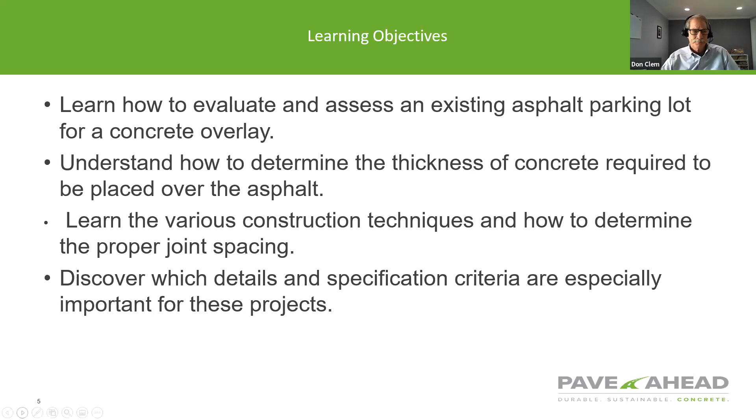Our resource primarily is this green guide, we fondly call the green guide, Guide to Concrete Overlays of Asphalt Parking Lots. This is published by the National Concrete Pavement Technology Center, out of Iowa State in Iowa. This is a very well-written guide.

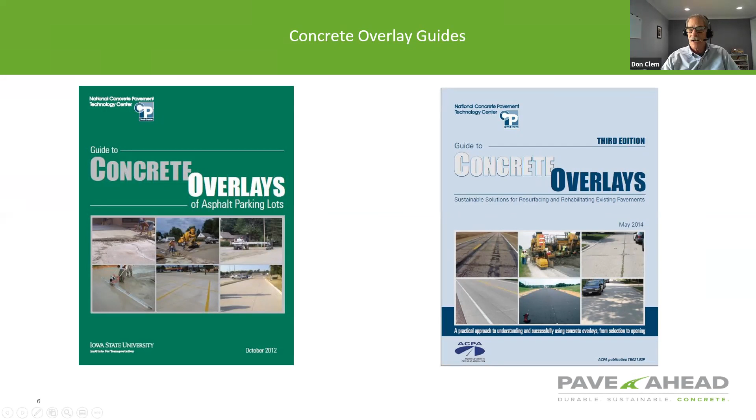So the green guide is for parking lots, and that's going to be the basis of our presentation today. Very easy to read. We also have, just as a reference, the blue guide, which is the Guide to Concrete Overlays, for roadways and streets, an excellent publication as well. The green guide was published in October of 2012, and we're in the process right now of rewriting that guide.

So just a little of my background. I've been in the industry since the early 80s, and actually my early career was a land development engineer for about 10 years, and then I moved into the concrete industry after that point. Most of my career has been in Colorado, working in the concrete industry, a lot of it designing pavements.

I'll give you just a brief history of pavements in Colorado, the overlays in Colorado. We really started those about the time I started in the industry, the late 80s. Illinois, I would note, has built a lot of concrete overlays. Colorado, just the DOT, has built over 1.5 million square yards of 6-inch overlay, and also 10 million square yards of concrete overlays of all thicknesses. They've done quite a bit more of the 8 and 9-inch overlays on state highways. They did a lot of that early on.

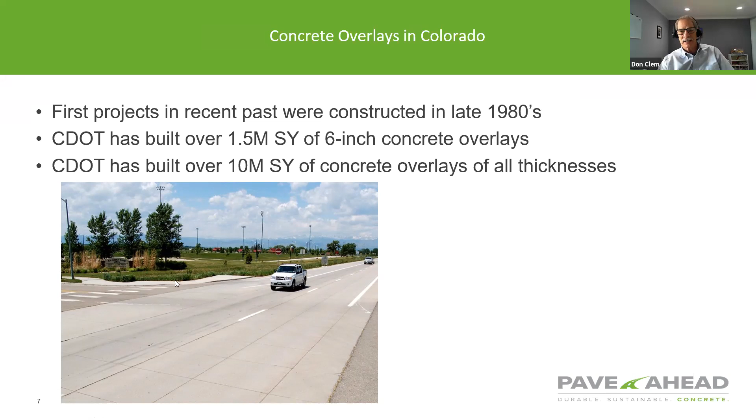Talking about parking lots, which is our focus today, the first one I was aware of in Colorado was a doctor's office in Monte Vista. This gentleman's Leonard Velasquez, contractor down in that San Luis Valley. This project that he built in '88, this is a photo 30 years later in 2018, was supposed to be a remove and replace of an asphalt parking lot with concrete, but the subgrade was so bad it wouldn't support the equipment as they were trying to tear out the asphalt. So they decided to do an overlay. They had read about it in a magazine and sort of just did it without a lot of knowledge. And as you can see, it's still holding up today. There's a few cracks, but 30 years is pretty good performance.

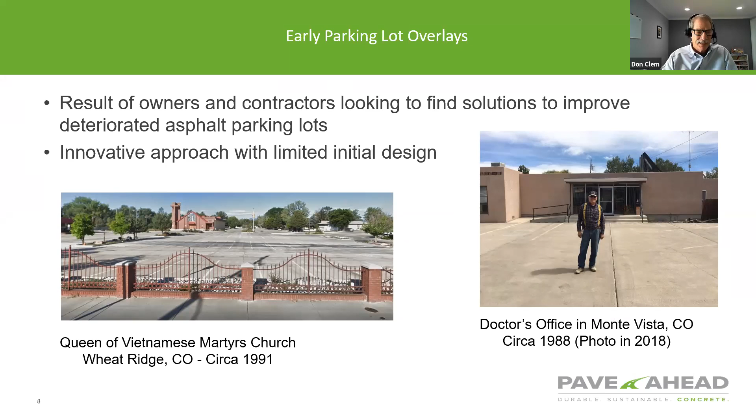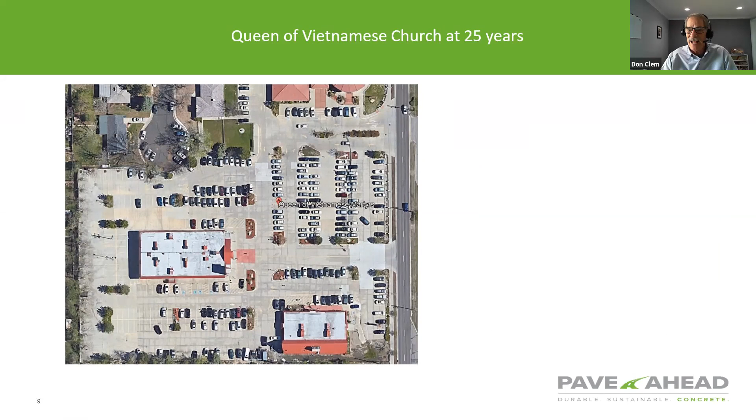Another old one, 1991, was the Queen of Vietnamese Martyrs Church. Interesting story here is this parking lot, which is pretty good size, was built by the parishioners. It was really an interesting project to watch. They used 2x4s as the forming material, 2x4 as the screed - very rough construction, as you can imagine. But after 30 years, you can see that this parking lot has really served them well. You can see how rough it is just by looking at the picture, but you can see an area here that they have replaced and an area here. Other than that, this is all the original overlay that those parishioners built. They were able to do that cheaper than an asphalt overlay since they did the labor themselves. That's a unique situation.

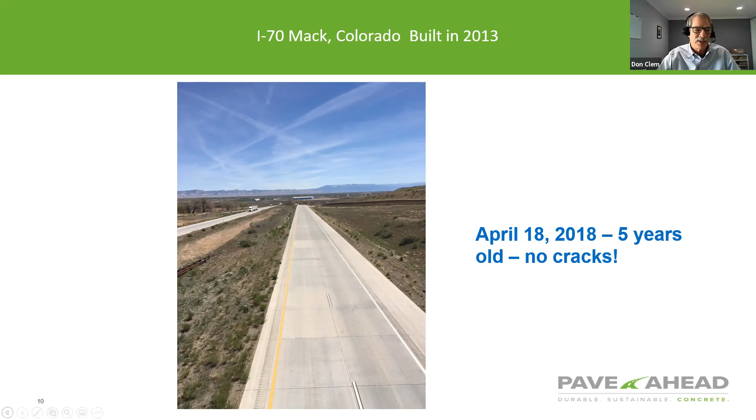The last project I'll show you as far as a roadway in Colorado is this - actually Interstate 70. This is a 6-inch overlay with 6 by 6 foot joint spacing. We call that our 6 by 6 by 6 Colorado overlay. The reason I put this in here is I just want to illustrate the top end of what these overlays can carry. So this is a 6-inch overlay on I-70, about 5 miles in from the western border of Colorado with Utah. It's a 5-mile project on both sides of the roadway. I took this picture when it was 5 years old, and I couldn't find a crack in it as I was driving down each of the sides of the interstate. For the pavement engineers on the call, the design traffic on this, if memory serves me right, was about 8 million ESALs. Pretty good traffic, and 6 inches is carrying that traffic. I think this was on about 8 inches of asphalt. So that's just to illustrate kind of the top end of what these bonded concrete overlays can do.

So you're probably asking, why specify a concrete overlay? Well, there's quite a few reasons, but probably the biggest reason is economics. We find that many times it's cheaper to go with a concrete overlay over an asphalt parking lot compared to remove and replace. So if we're looking at remove and replace, basically at the end of the life of the asphalt parking lot, keep in mind that these overlays can actually be less expensive, on the order of about 30% has been my experience. It's a better use of materials because the owner has already paid for the asphalt and the base, so why not reuse it as opposed to tearing it out and paying somebody to haul it off? It just doesn't make a lot of sense. This is a much more sustainable type of an approach.

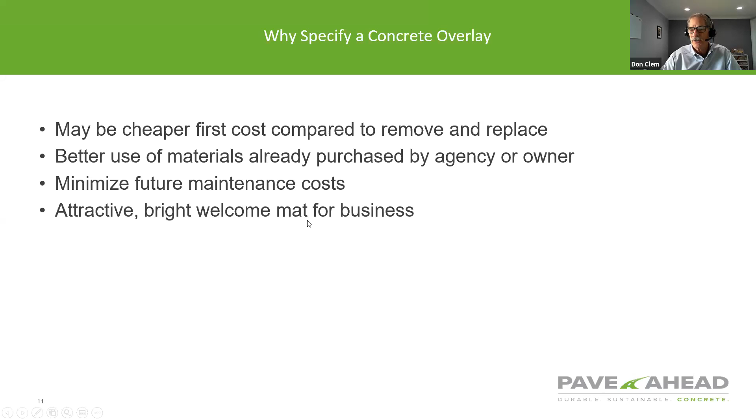Once you create the concrete overlay, you're going to minimize your future costs because basically you have a concrete parking lot from that point on, sitting on a very good base. And then finally, you're going to have a bright welcome mat for your business. It really transforms the parking lot from a problem into something that attracts businesses.

So let's talk about parking lot selection, because that's really important. That's the key to a successful project, is to determine if a project is a good candidate. An asphalt parking lot is a good candidate for a bonded concrete overlay, or perhaps it may not be. And it's real critical to be able to discern the difference between the two.

I'll mention here that the two types of overlays for an asphalt parking lot are bonded or non-bonded. We would always rather prepare a bonded or design a bonded overlay if we have everything else equal, because a bonded overlay, which is going to behave as a composite pavement with the asphalt, is going to be less thickness. Generally an unbonded overlay is going to be about 1 inch to 1.5 inches thicker than a bonded overlay. So a bonded overlay is going to be more economical where we can do that.

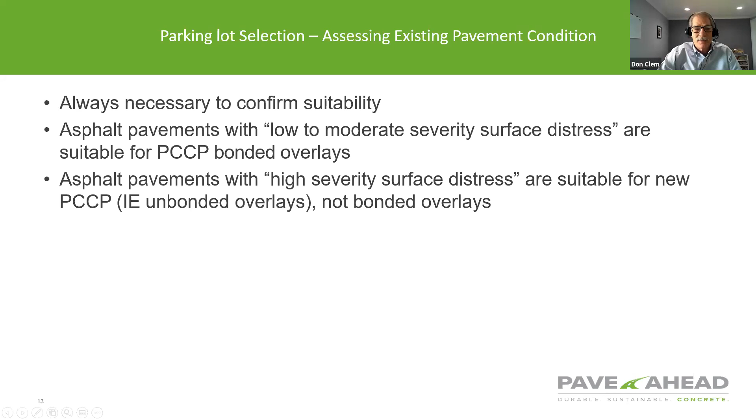And what we're going to look at, right out of the green guide, is different types of distresses that we typically run into with asphalt parking lots. We're going to put them into categories of low to moderate severity or high severity surface distress. If we're in the low to moderate, that's going to be a good candidate for a bonded concrete overlay, as long as the thickness is there. If not, then we may have to look at something like an unbonded overlay, or perhaps a remove and replace at that point.

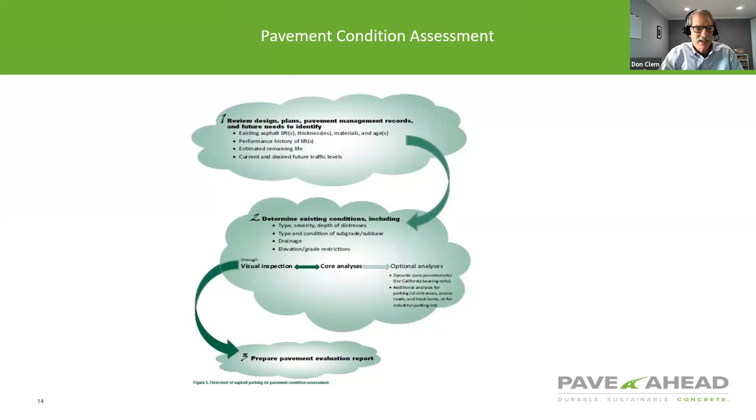So there's 3 steps that the guide puts out as far as determining the suitability. One is to review the existing information, plans, maintenance records, history, things like that are there. Second, determine the existing conditions. And then third, you want to compile that information.

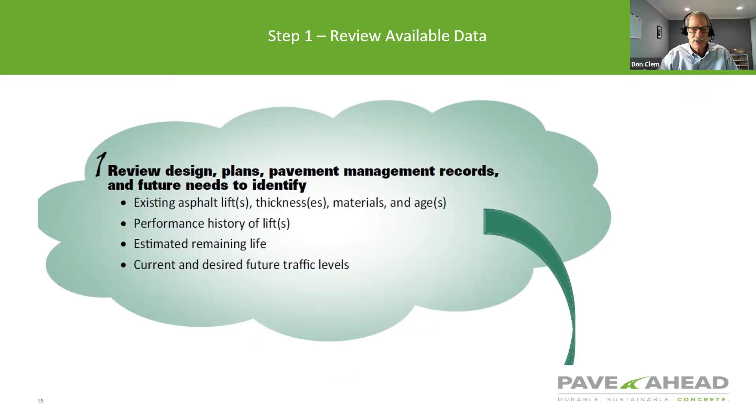So we start with a review of information that is on hand, any kind of written information, performance history, estimated remaining life, current and desired future traffic. So we're really trying to find out everything we can about the parking lot. We're looking for any problems associated with the parking lot, such as drainage. We really want to uncover everything we can about that history of that parking lot.

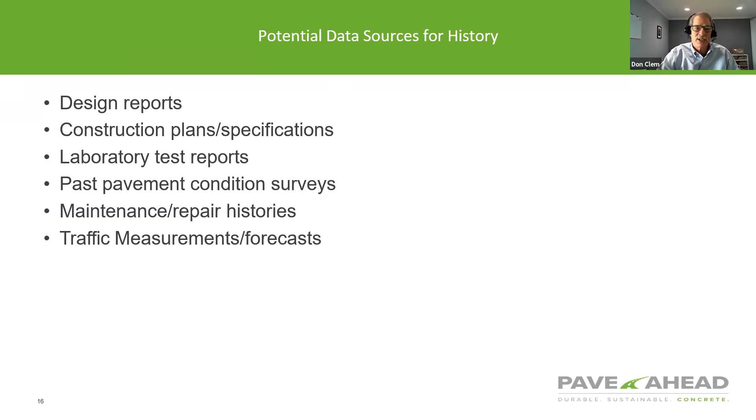Some of the items that we might turn to or look for: design reports, geotechnical reports are good to determine, give us an idea of the properties of the soils below the pavement. Construction plans are great, past condition surveys if they exist, maintenance and repair histories, particularly history of overlays that might have occurred. And if any kind of traffic measurements are forecast, particularly if the traffic is going to change with this new parking lot, you certainly need to know that.

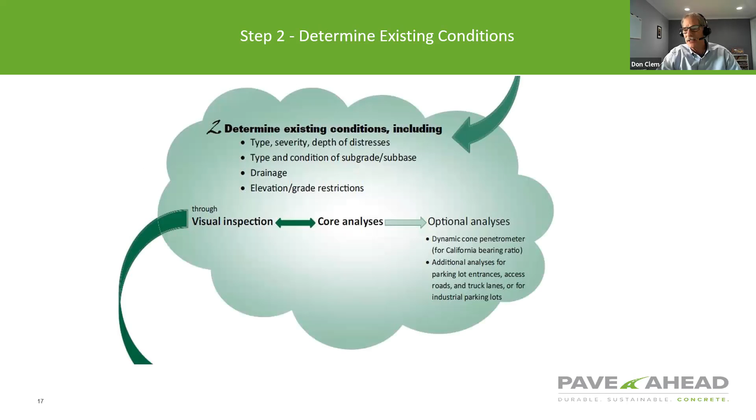The next step, which is probably the most important, is to actually go out to the parking lot and review what you have out there. Do an assessment on site. We want to determine the type and severity of any pavement distress and condition of the subgrade. So we're looking to do some cores, or at least drill some holes, so we can see how thick the layers are and see what kind of shape the materials are in.

We also want to look, if there are distresses, we want to determine the cause of those distresses. Is it a drainage issue? Because if it is, when we design an overlay, we want to make sure we address any drainage or other potential problems. And then finally, we want to look to see what kind of elevation constraints we might have. Are we surrounded by garages where we have to tie in to an elevation? Or do we have a situation where we have a curb and there's really just landscaping behind it where we can overlay the curb? Those are the types of things we're looking for.

So I mentioned we definitely want to take cores. It's very critical that we know how thick each of the layers are, and we have to take enough cores to have some confidence of what the minimum thickness is, because we always design based on the minimum thickness that we find in a given area.

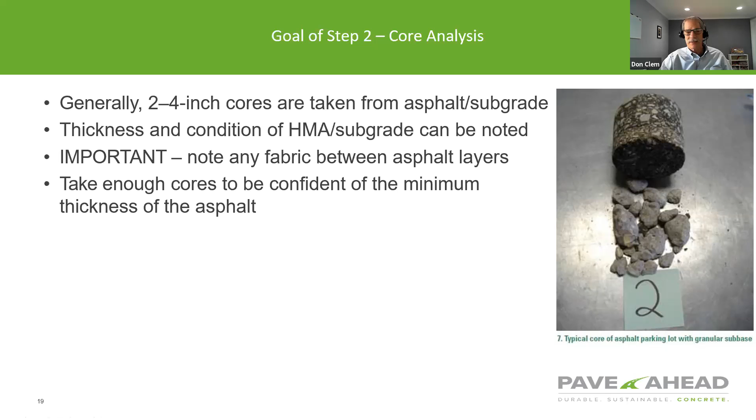So always look for this fabric. If you find it in there and it's acting as a bond breaker, which it typically will, then you probably don't want to design a bonded overlay. You might want to look at an unbonded overlay in that situation, or maybe even a removal and replace. And then finally, you want to take enough cores to make sure you're confident of the thickness of the asphalt out there. It really is a critical element.

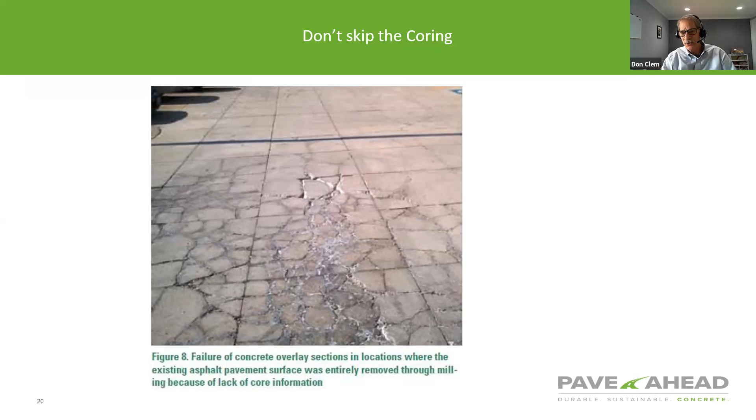And I have experienced this myself. We did an experimental project in about '91 or '92 with the Department of Transportation out here. We had the same thing happen - we punched right through the asphalt to the subgrade. And what we did is we wanted to test a bonded concrete overlay. So what we did is we put a new layer of asphalt back in there, thinking we were trying to test that as a bonded overlay for the concrete.

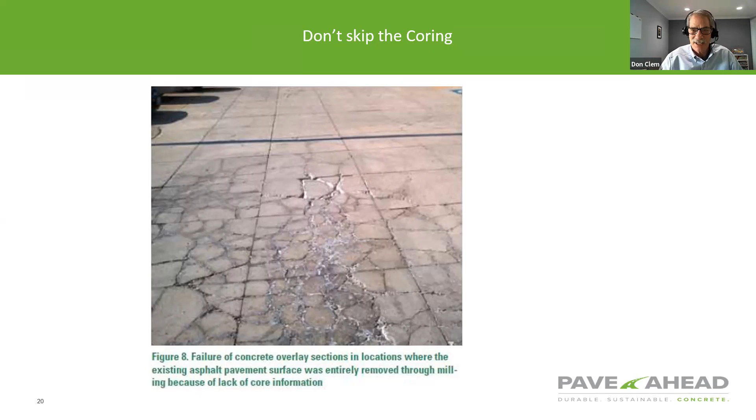What happened was that didn't work with the new asphalt because we didn't get bond. As many of you know, new asphalt acts as a bond breaker. So we learned that lesson pretty quick. It didn't look as bad as this, but it was pretty bad. And actually, after almost 30 years, I go by this project about once a month, and it's still in place - the fibers are holding it together, but it really looks bad.

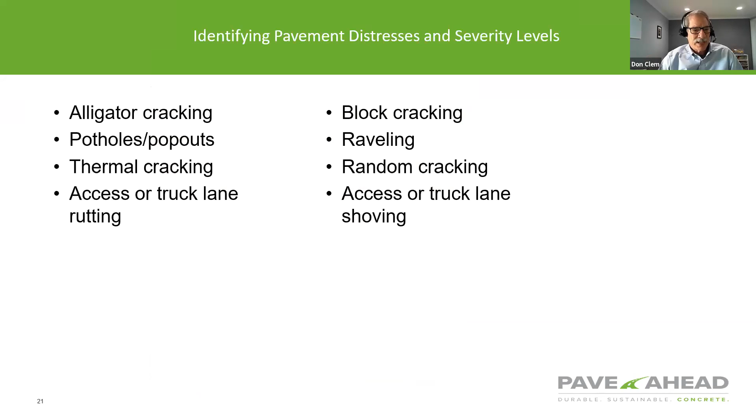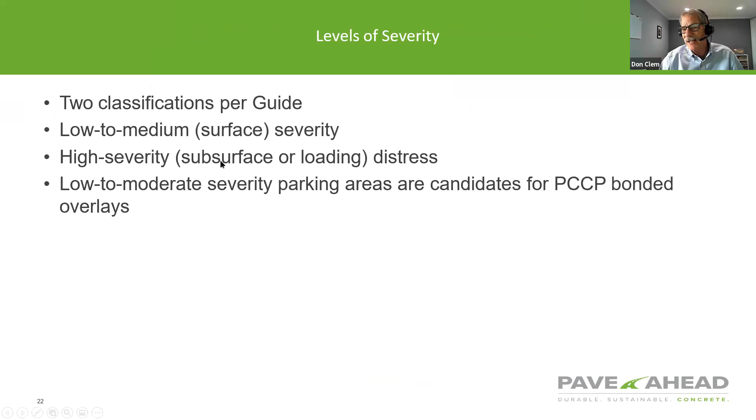So these are the types of distresses identified in the guide, and I'm going to go through these quickly, but the guide will identify and have pictures of low to medium severity and then high severity. Generally speaking, what you're going to observe - this is alligator cracking - in the high severity is some vertical separation. There's a vertical component to high severity areas of distress, and that's going to be consistent through all of these pictures and types of distresses we examine.

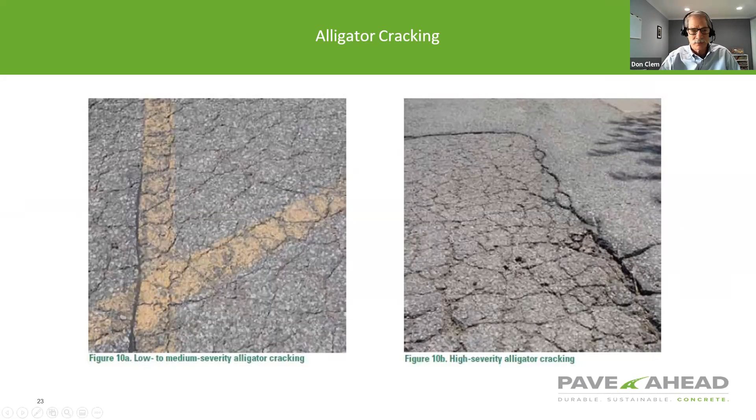So this area, low to medium severity, is fine for a bonded overlay. The high severity is not. In this situation, if we have a lot of areas like this, we're going to look at an unbonded concrete overlay or perhaps a remove and replace.

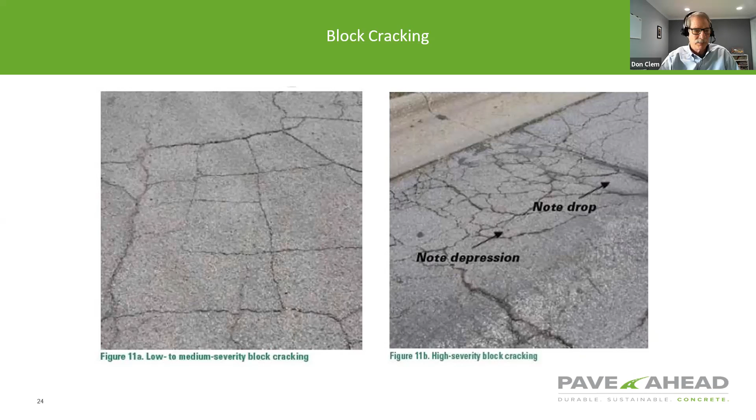Block cracking, you see here - another type of asphalt distress. Again, low to medium on the left, high severity on the right. Potholes, raveling - you can see kind of a vertical component here.

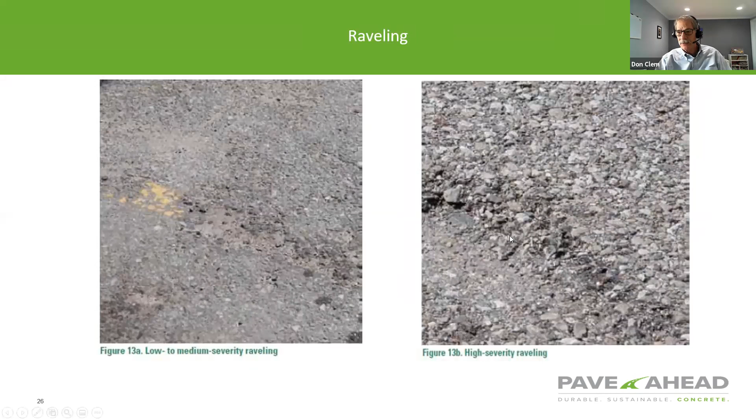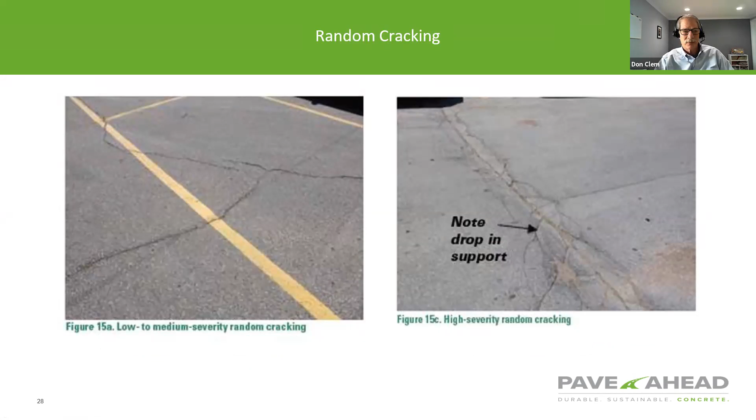Thermal cracking, random cracking - the guide does a really good job, particularly for someone with a concrete background, of outlining what you look for as far as distress with an asphalt pavement.

After we do this field examination of the project, and we've done the research for the design reports, and you speak to managers about what problems they have on the facilities, then you prepare this evaluation report. You pull all this information together, and at that point you're determining whether you can go forward with a bonded concrete overlay, unbonded, or what the best approach will be. We say prepare a pavement report, but it may just be a one-page document, not necessarily multi-page. Depends on the size of the project and complexity.

Just to recap, when we're looking at an existing parking lot, we want pavements that exhibit low to medium surface severity. We want at least 2 inches of asphalt - I prefer 3 myself, but the guide does go down to 2 inches. So we do offer design for 2 inches.

And then we want minimal vertical constraints along the edges of the project relative to the area of the overlay. This is sort of a judgment call - I'll give you an example. If you had a fairly small parking lot, let's say a townhouse project, maybe 70 by 70 or 100 by 100, surrounded by garages and townhouses. All the way around this project, you've got to match to those garages, so around the perimeter you're going to have a transition where you go from matching that garage up to the overlay, plus drainage considerations. You've got probably anywhere from 5 to 10 feet of transition going from full depth up to the overlay, all the way around that area.

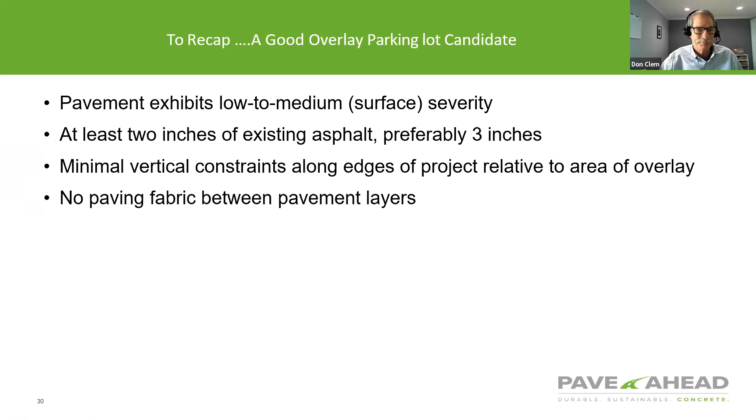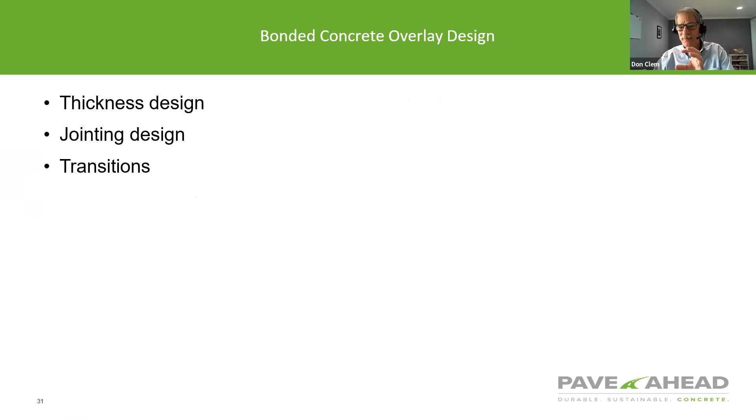So let's talk a little bit about thickness design and jointing design. They really go hand in hand, as you'll see - you're really designing a system where the thickness design and the jointing design are intertwined.

Now we're going to focus a little bit more on the guide. The tables in the guide are really meant for light duty parking lots - we're not necessarily looking at industrial facilities. We're looking at shopping centers, golf courses, churches, typical municipal buildings. That's the type of parking lot envisioned when this guide was put together.

The design is based on full or partial bond, as I mentioned before, which forms a composite pavement. The key to this working is really the close joint spacing. If you can imagine, that close joint spacing really reduces the stresses in the concrete pavement - think of the moment arm as you look at a 4 or 5 foot joint. That's really a small concrete panel, and the stresses are greatly reduced by that small moment arm.

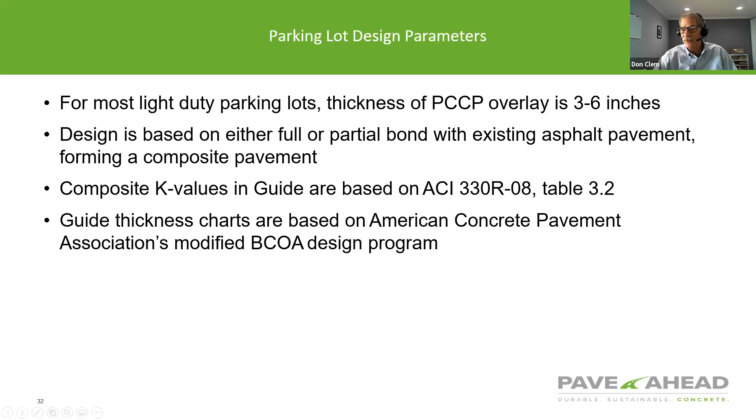The K values are out of ACI 330, which is the design guide for concrete parking lots, table 3.2. And the basis of the design is the American Concrete Pavement Association's modified bonded concrete on asphalt design program.

The guide operates on a zone concept - a little bit different concept. Each area, there's 3 areas in the design, we'll go over those in a minute, but we use the zone concept.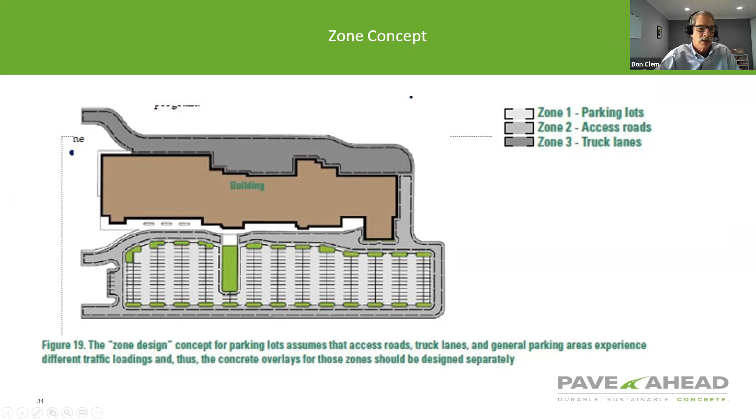So 3 different thicknesses, if you will, on a given project. Each table includes those 3 thicknesses, and we have 3 tables here: one for Des Moines area, which is probably what you would use being in Illinois, one for Sacramento, and one for Gainesville.

So you can see that this is a mechanistic design. It takes into account the elevation, the weather patterns, and moisture patterns for a given location. Existing asphalt thickness is 2 to 6 inches, joint spacing 4 to 6, fiber or no fiber condition, and finally compressive strength of 4,000 or 4,500.

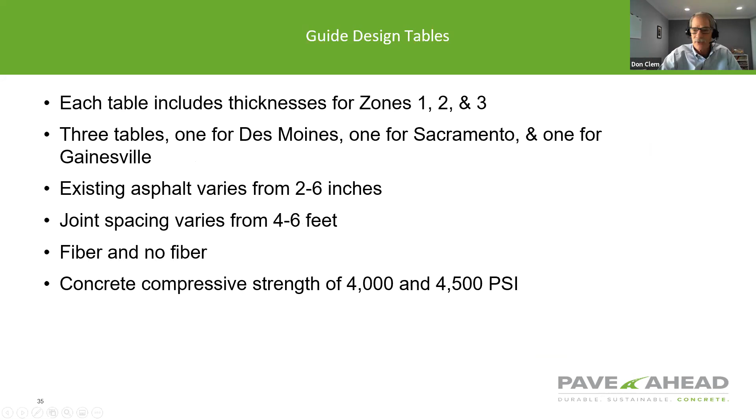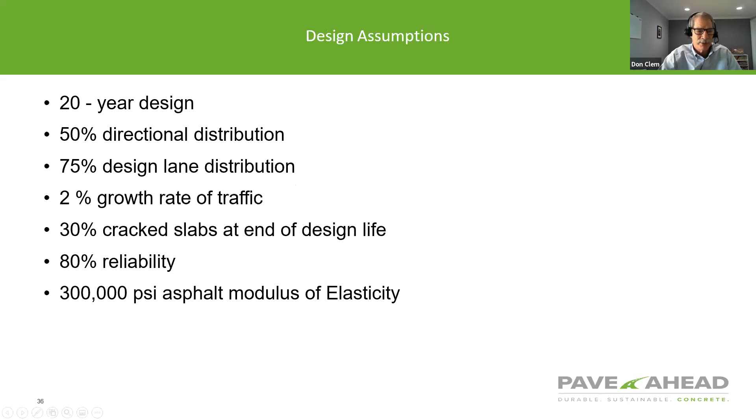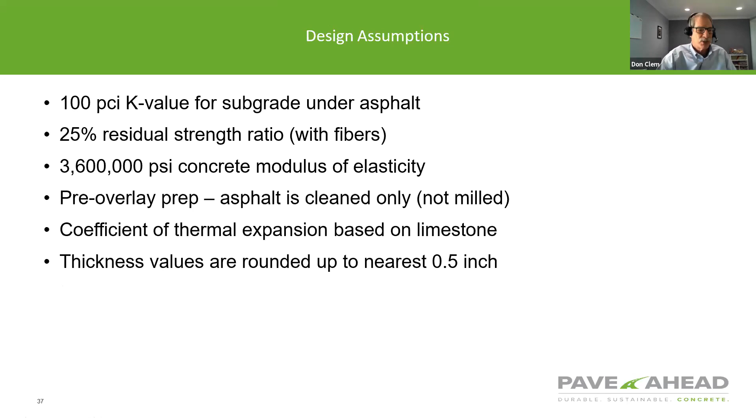Design assumptions, probably the critical ones, are the 20-year design, 30% slab cracks at the end of design, 80% reliability, and an asphalt modulus of 300,000. The other critical one would be this K value of 100, as I mentioned earlier, which is a fairly poor clay soil, typical in a lot of areas of the US.

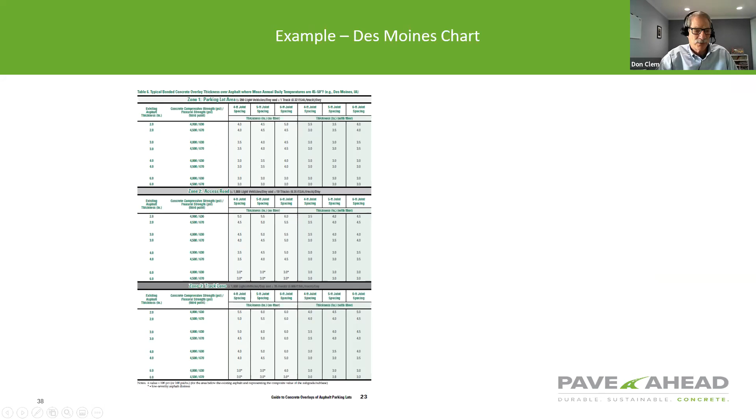So here's what a chart looks like. This is the chart for Des Moines, and you can see we've got zone 1, zone 2, zone 3. Let's assume we're going to design an access road for a project. Let's take a look at Des Moines, perhaps we're in Illinois, so we're going to use the Des Moines chart. The way we use this chart is very simple.

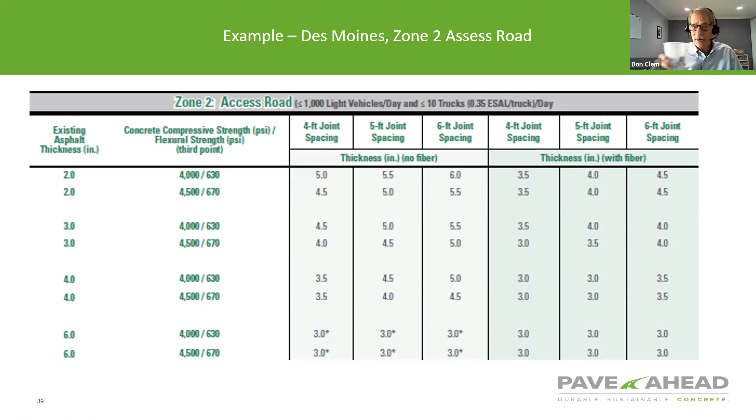We start over here with the existing asphalt thickness, and let's say we've determined that the minimum asphalt thickness is 3 inches. So we know we're going to be in one of these 2 rows, and the next decision we make is, do I want 4,000 psi or 4,500? If I'm in Illinois, I'm probably going to spec 4,500, and that's probably what I would spec here in Colorado.

Due to the heavy use of de-icing salts and a lot of freeze-thaw cycles, let's just assume 4,500. So that locks us into this row. Next decision is, do we want a no-fiber condition or a fiber condition?

I generally, for most parking lots, will go with this fiber condition. I like the extra protection of the macro fibers in there, and we are referring to macro fibers, not microfibers. So let's go with fibers. Now we are down to these 3 columns within this row.

So you can see that we have 3 different solutions that would work for this theoretical situation. We can go with a 3-inch thick concrete with 4-foot spacing, 3.5 inch with 5-foot spacing, or 4-inch thick concrete with 6-foot joint spacing. Perhaps an engineer could price out each one of these to see which is the most economical.

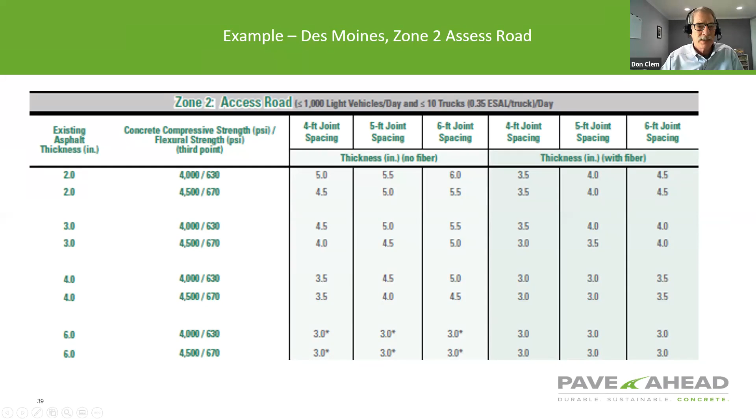When I do designs, I would generally fall to this one, the 3.5 inch with the 5-foot joint spacing, trying to balance the number of joints versus the thickness of the concrete. I'd probably prefer this 3.5 with 5-foot joint spacing, though other engineers might have a different preference, but you can see your options there. So that's how you would design the thickness and joint spacing of a parking lot.

I want to mention what you might do if you have a parking lot that doesn't fall into those parameters I've outlined. Perhaps the soil is a very strong sandy-based soil, with a K value of 200. You may want to go to this other model, bonded concrete on asphalt ME, which was developed by Julie Vandenbossche out of the University of Pittsburgh.

And it's really a nice program, it's free to use. You can hit the geographical information button, that's the first input, and then select Illinois. There's probably going to be about 6 or 7 cities that are going to pop up.

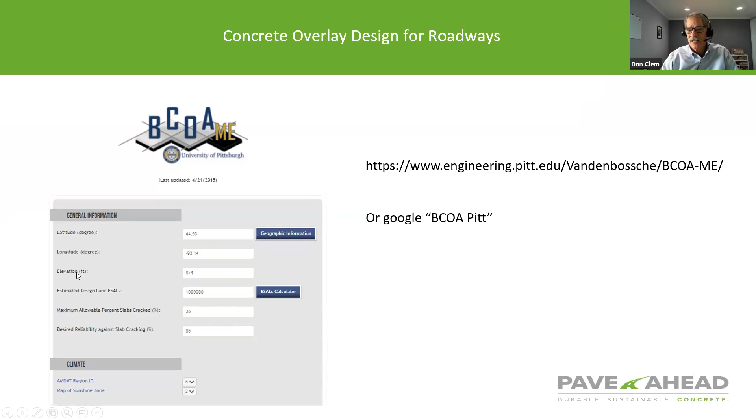Certainly Chicago, Springfield, and some other cities would pop up. You just select that city and it will populate latitude, longitude, elevation, and then you continue on with your inputs. So that's what you might do for a street.

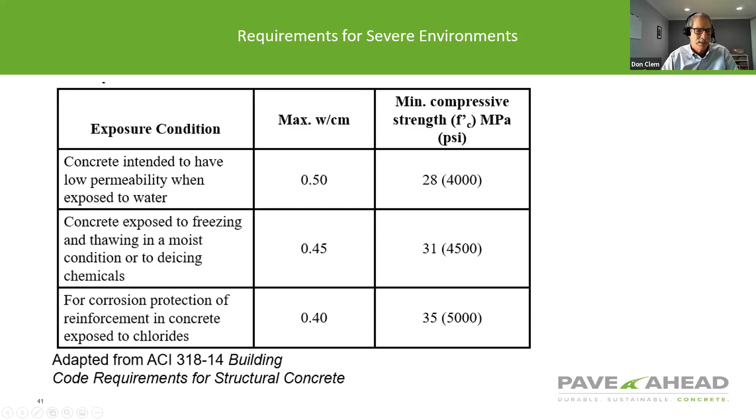I'm not going to talk a lot on mix design because there's really not a whole lot of difference between a concrete overlay and just an ordinary concrete pavement. But I mentioned you want to be at a 0.45 water cement ratio and 4,500 psi if you're in a freezing and thawing situation with exposure to de-icing chemicals. I think that's pretty common, at least for the Chicago area.

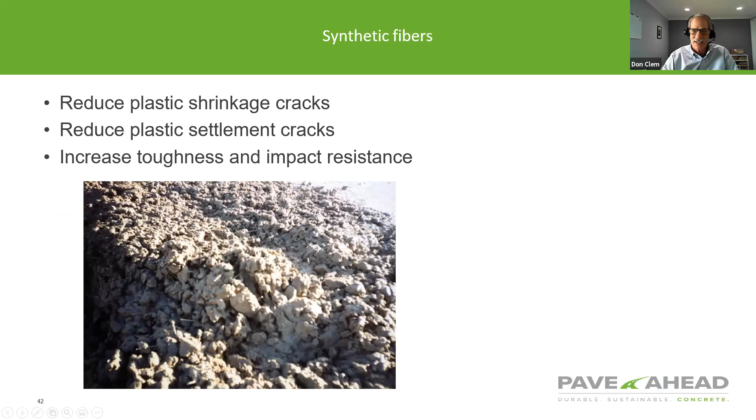A little bit on fibers. They are very important in these overlays, and they reduce plastic shrinkage cracking and plastic settlement, and they also increase the toughness and impact resistance. So there's a lot of benefits to fibers, but I do want to illustrate the difference between micro fibers and macro fibers. There's quite a few differences — it's really an apple and an orange. When we're talking about specifying fibers for overlays, sometimes called structural fibers, we're talking about macro fibers.

So we'll start with micro fibers. They're fairly small fibers. They do help prevent plastic shrinkage cracking. The dosage is normally fairly small, typically about 1.5 pounds of fibers per cubic yard, and they provide surface toughness. You see that these fibers are specified a lot of times — microfibers are specified for concrete sidewalks by cities. You'll see them in a city spec quite a bit.

Macrofibers, on the other hand, are larger and longer. They will actually reduce shrinkage cracking, and you can replace temperature steel reinforcement with these macrofibers, but the dosage is quite a bit heavier — it's 3 to 5 pounds per cubic yard typically.

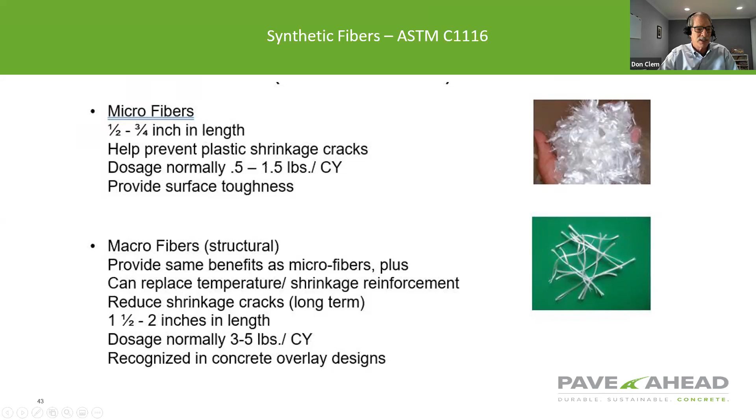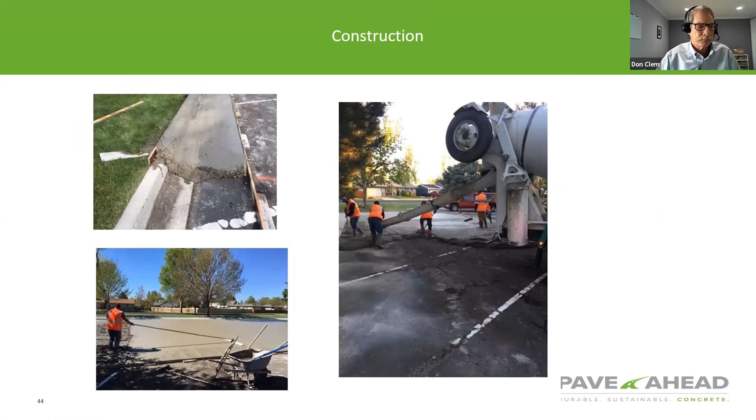With that, let's move into construction. Theron has been kind enough to provide more or less a case study which walks us through construction. We're going to use that to illustrate a typical overlay, and it really has all the elements, so it makes a great case study in construction of an overlay.

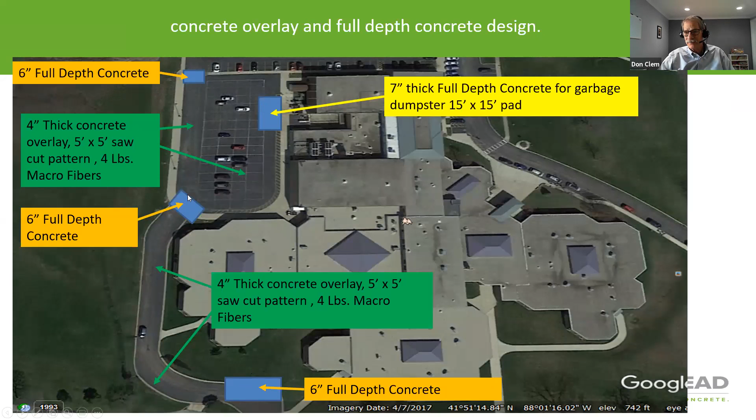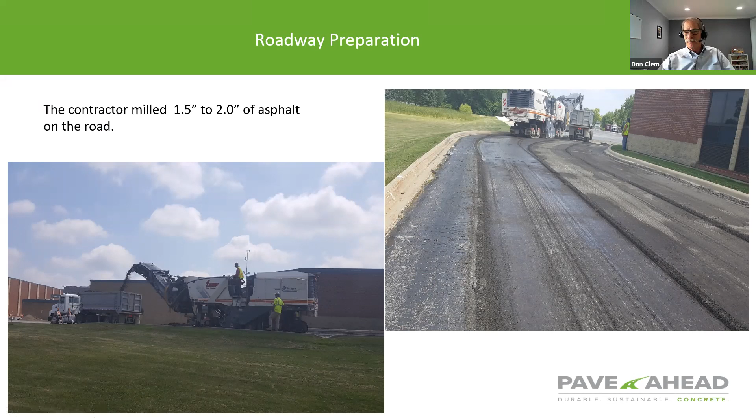For the roadway, the contractor actually milled the surface to get a nice level surface that you can see here, and that's fairly typical of roadways. When we build concrete overlays for roadways in Colorado, we typically will mill about 1 inch of asphalt off, as long as we have enough asphalt that we can sacrifice that inch. That is critical. For most parking lots, we do not mill, because generally there's not enough asphalt in these parking lots that you could afford to mill — you would be punching right through the asphalt with the milling operation.

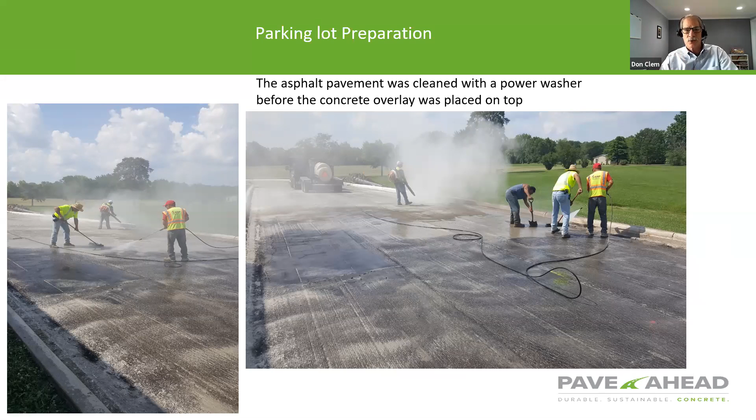So here you can see the surface prep. It consists primarily of a power wash, and then you follow that with placement of the concrete right on top of that. The other nice thing about this process of washing the asphalt down — you want to do that right in front of the paving operation as well, because it will cool the temperature of that asphalt surface off. You don't want to be placing concrete on a surface that's higher than 120 degrees. So if you wet that surface down, the evaporation process is going to cool that existing surface.

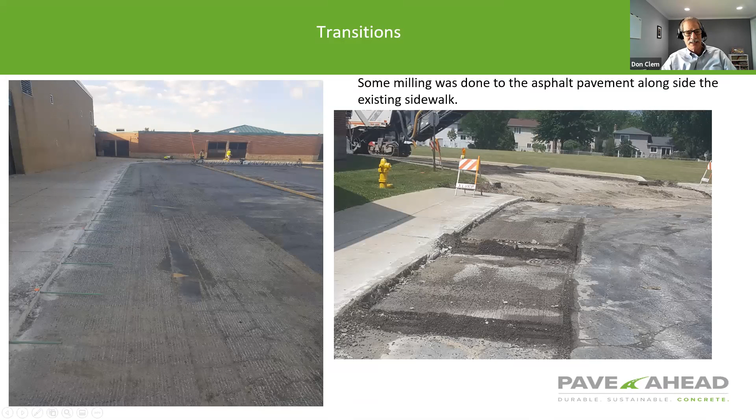Here you can see some transition areas that we saw in that sketch earlier — transition area here, transition area here. You've also got some tie bars tying into that existing concrete section there. Since this was a school, my assumption on the tie bars is they wanted to make really sure they did not have any kind of tripping hazard there, so they put the tie bars in to lock that in.

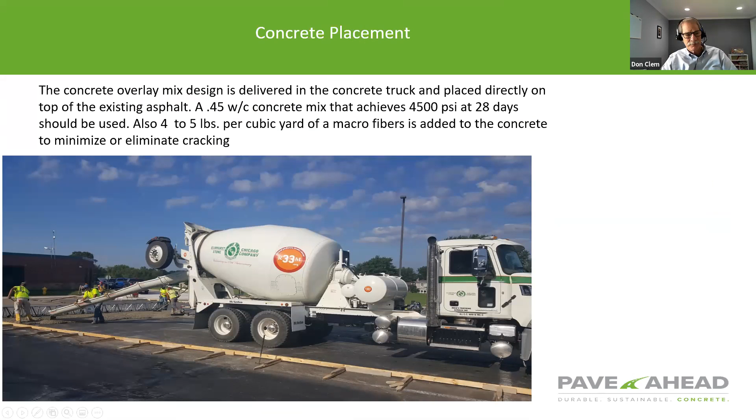I mentioned that the mix design was 4,500 psi, with 4 to 5 pounds of macrofibers. You can see they're forming right on top of the asphalt and placing right on top of that cleaned, and it looks like it's moist asphalt. Just another shot.

Then the concrete's leveled in the opposite direction to the paving train, and here you can see a razorback screed with a vibratory motor on it. This is a really nice way to build a project. You really get a good result, this is probably the way we see most projects get built. I'll show you a couple other methods as well, but this screed operation is probably most typical.

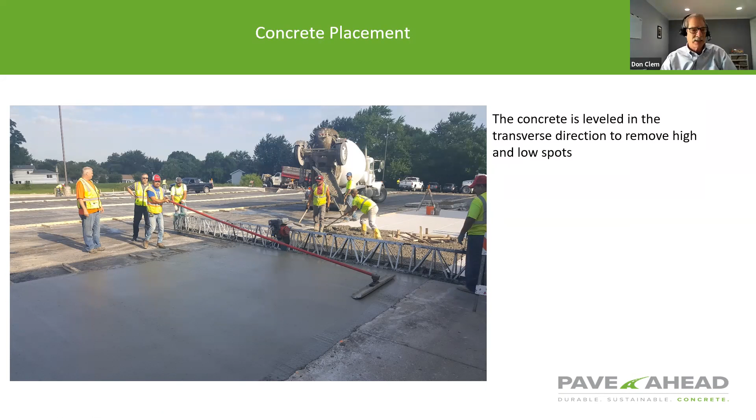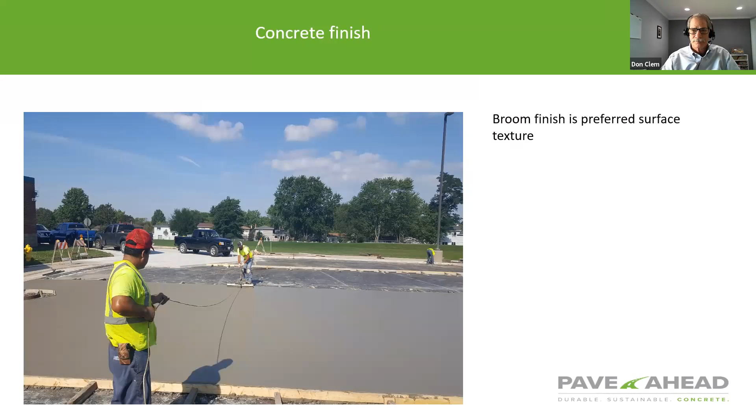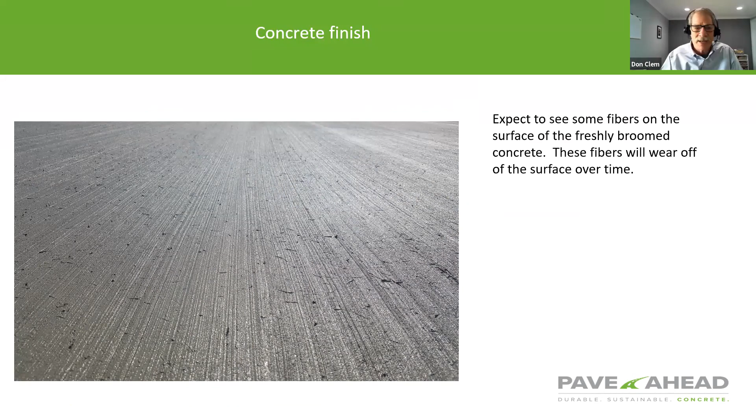And then finally, a broom texture is the preferred surface. Now with the fibers, these macrofibers, you can expect to see some of the fibers popping up through the surface, as you see here. Those will wear off over time, and you won't notice them after the pavement's been in service for a period of time.

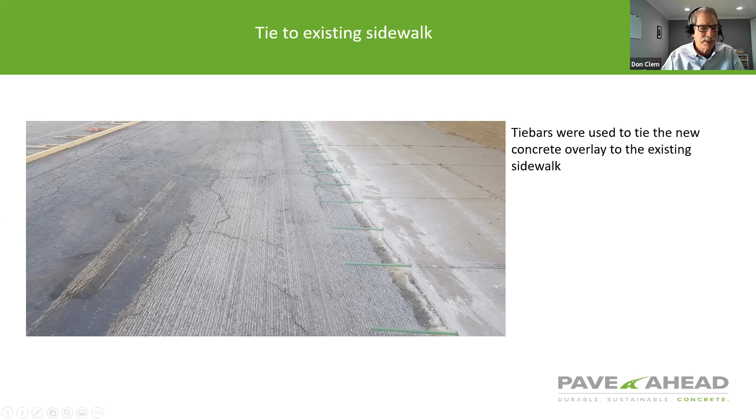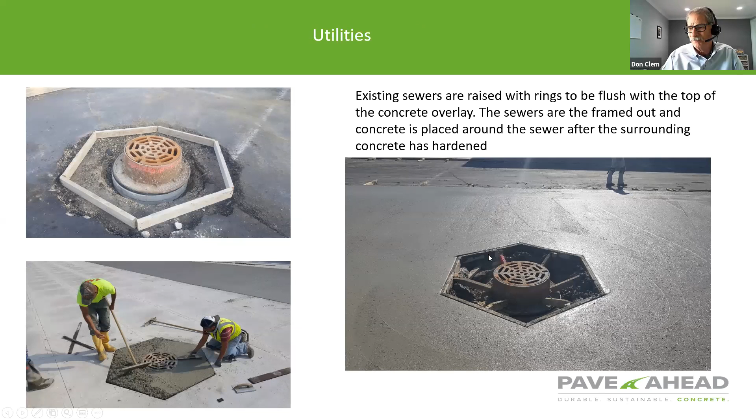And there's the tie bars put in to make sure that there's no tripping hazard here, because I imagine you get a lot of pedestrian travel on that pavement. Existing sewers were raised and boxed out, as you can see here. That's pretty typical of any concrete construction, any parking lot construction.

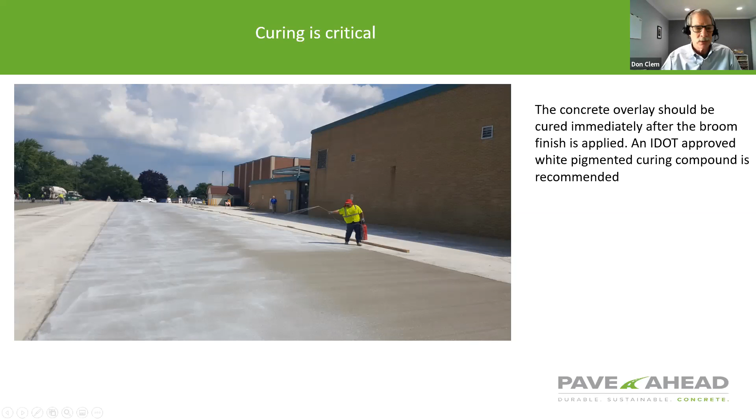And then finally, the curing compound was put on. You really want to put a heavy coat of curing compound on these concrete overlays, particularly these 3 and 4 inch sections, because imagine what you've got is a thin section of concrete, relatively speaking, to what we normally have. So there's not a lot of moisture in that thin section, but you have a lot of surface area. So if you're operating in, for perhaps Colorado, where we have very low humidity, we might have wind, it might be hot, we lose a lot of water out of that pavement if we don't get that curing compound on quickly and get it on very, very thick. So that's one of the considerations that's a little bit more important with a concrete overlay than it otherwise might be for just a regular concrete paving project. You really want it to look like a white piece of paper.

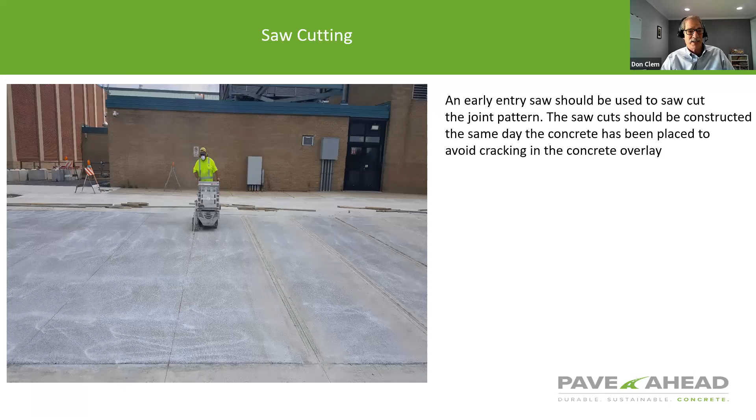And then here you see the saw cutting operation. This is an early entry saw, which is typically what we see for these projects. You can make the cuts the same day. You always want to have a backup saw on a project, of course, just like you would for any concrete pavement project, but it's a little bit more important because of the number of saw cuts you have to make on these projects. You've got a lot of joints.

And then an independent lab of record should be hired by the owner. And of course, all the testing should be done by ASTM standards, and the cylinders should be cured by ASTM standards, of course.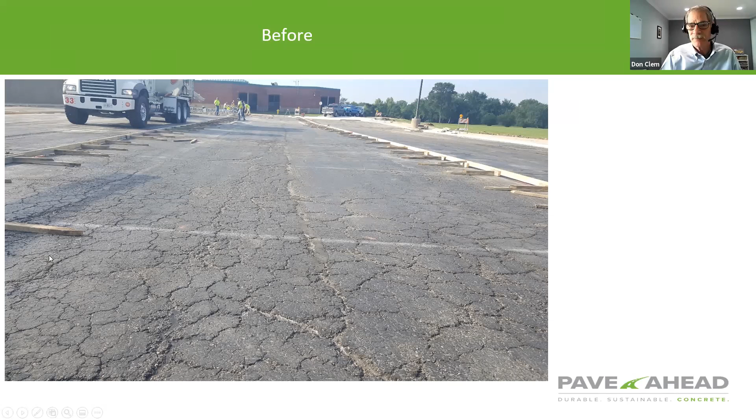Let's talk a little bit about details. I'm kind of watching my time. I want to make sure I don't run out of time.

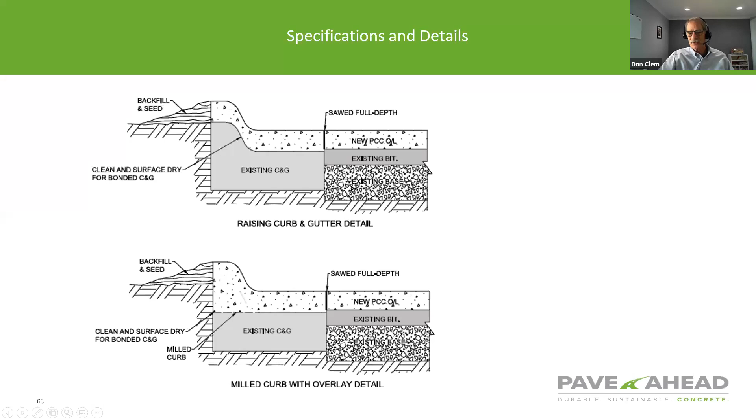So this project, this picture was taken in '97, and this is Parker Road, and it runs between Aurora, Colorado, which is where I live, and the town of Parker. It's a very, very busy road, as you can see here.

Here we just overlaid the curb using a shoe on this paving machine. This was a Gomaco paving machine, and we just overlaid that old curb, as you can see here. It was interesting. I was working on this particular project, and as an industry, we did not in '97 think this would work. And there was an engineer with the Colorado Department of Transportation that said this will work, and he put it into plans.

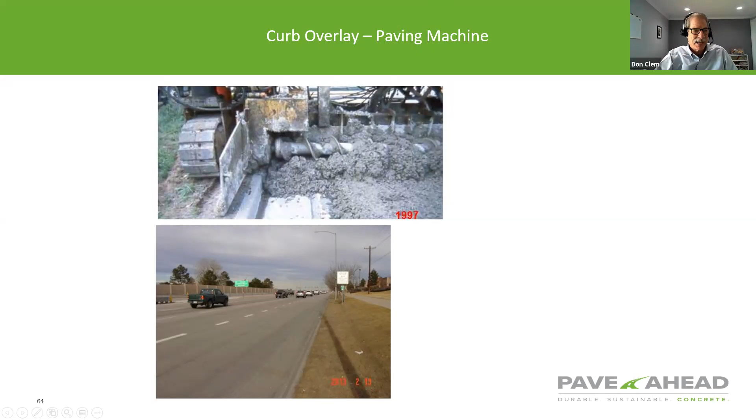Here's a shot in 2013. I drive this road all the time, and this curb has held up with no cracking whatsoever. So he was right back in '97, and we were kind of cautious as an industry, but that engineer, his name's Al Eastwood, he was correct.

Here you can see overlay of an existing curb, and they're just doing it by hand, and these guys do a wonderful job. This is on that Thorncreek project where I showed you the night shot earlier. The first step of the project was to overlay that existing curb, and that's what it looked like after they stripped the form there.

You can see here's basically an island within the middle of that parking lot. You can see other islands there. So the first step on this project is the contractor goes out and overlays all of these curbs.

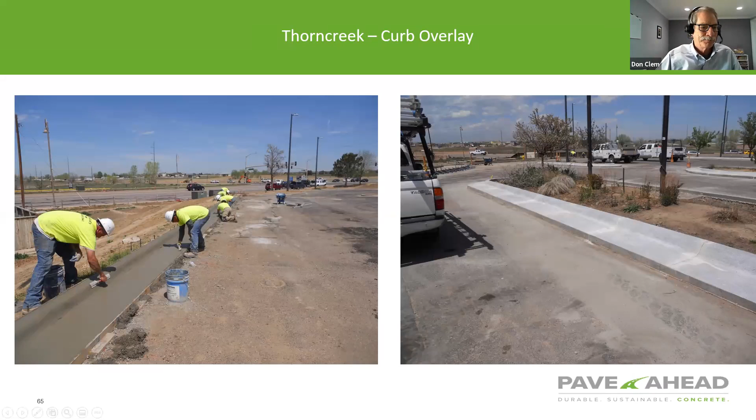Now the other way to do it, if you have to transition into a curb for whatever reason and you can't overlay it because of constraints, then what you do is you actually remove a section of asphalt, and that might be one joint. You want to go 4 foot minimum, so you might go 1 or 2 panels depending on what drainage requirements you have. That really drives that decision a lot of times. So you'll pull out the asphalt in a section here and transition up to your overlay section.

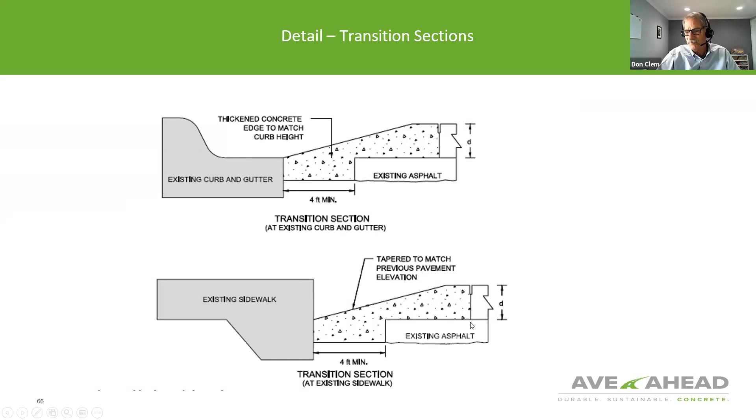And that's one method of doing it, matching the existing curb, or you might match a point below an existing sidewalk, basically creating a gutter more or less here. So that's another way to do the transitions.

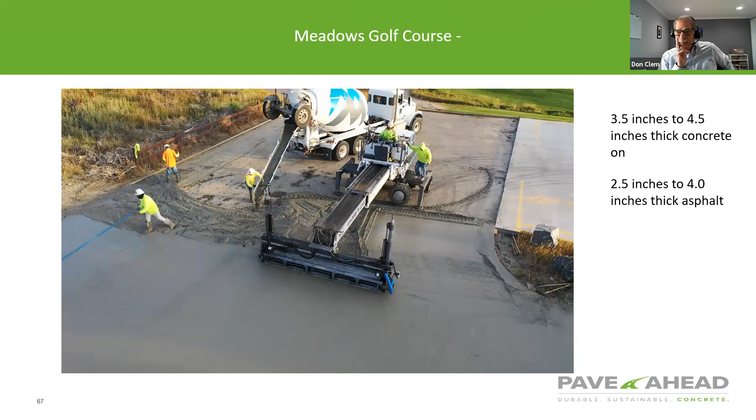This is another method I wanted to show you of construction. This is a laser guided screed, and this is really a slick way to build a project if you've got a bigger project, probably a medium-sized project, I'm thinking about 100,000 square feet or so of parking lot. Typically you might see these laser guided screeds, and that's a really quick way to build these parking lots. This particular one was 3.5 to 4.5 inches of concrete on 2.5 to 4 inches of asphalt. We had a lot of variation on this one of asphalt thicknesses and the condition of the asphalt.

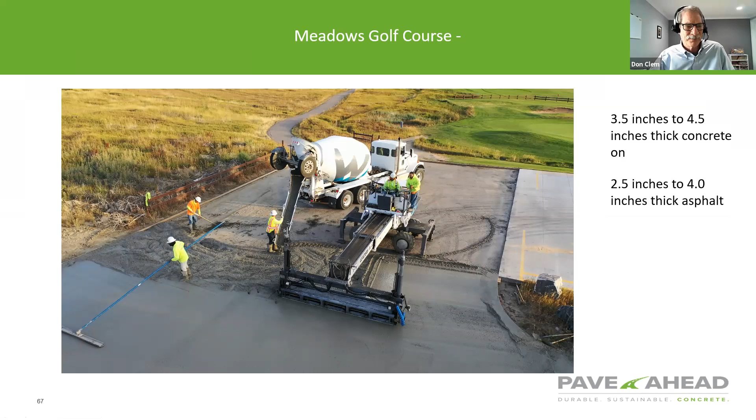And then this was a, let's say 4 or 5 inch concrete, 4.5 inch I think it was, overlay for the roadway coming into the golf course. This is Meadows Golf Course out near the foothills.

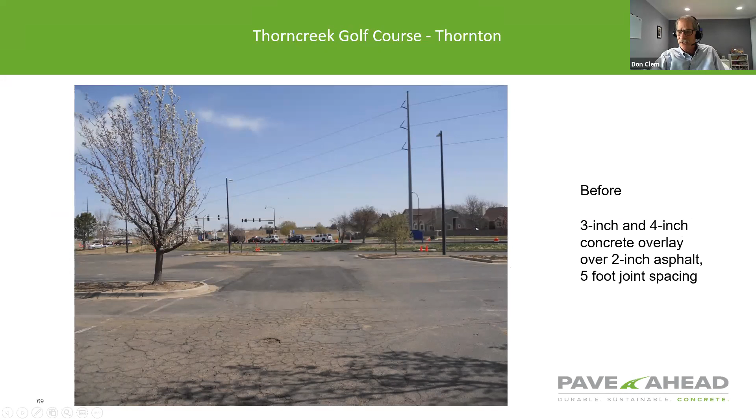Interesting thing about this project is the city of Thornton, which is north of Denver, did a $7 million upgrade to this golf course. They changed the layout, they remodeled that clubhouse, and this parking lot was the last part of that $7 million upgrade. They really wanted a parking lot that matched the quality of the golf course that they had built, which was really nice. That was a lot of money put into a golf course.

A final project that I wanted to show you is this Pikes Peak shuttle overlay, and this was done in 2018 and 2019. So this is a very large project. This is a 4.5-inch concrete overlay. The asphalt is 5 to 7 inches, and the joint spacing on this is 6 foot by 6 foot.

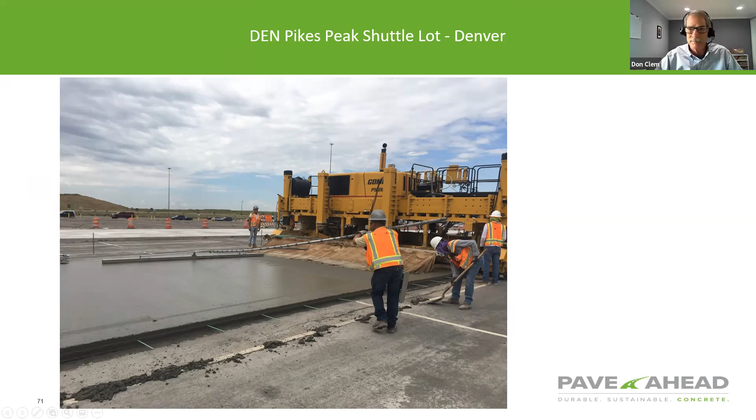It's about 26,000 cubic yards, 34.5 acres. Last year, just about the beginning of April, the contractor—so he finished this in 2019—had just brought all the materials out to the plant, and he was ready to jump into phase 2, which would have created a 62-acre project. It was basically the other half.

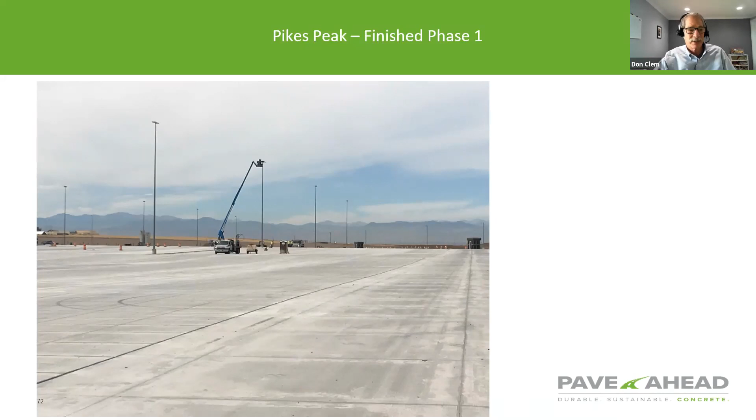Total concrete would have been 50,000. Within 3 or 4 days of him starting the operation, DIA called and actually canceled the project. So we were kind of heartbroken. They didn't postpone it; they canceled the project. So we don't know if the second phase is ever going to get built or not. Hopefully it will once the air industry recovers. That's our hope anyway.

So we've got a little bit of time. I just want to recap some of the things that are important that we've covered. Number one, I can't overemphasize, you have to determine the minimum thickness of the asphalt. If you find paving fabric, and you don't have enough pavement on top of the paving fabric, go to an unbonded concrete overlay. Consider those thickness charts as minimums.

If in your area the contractor can't build those, you may want to add a half inch of thickness to make sure the contractor will at least build that minimum thickness. They must be able to avoid thin sections. There's just no forgiveness in such a thin section of concrete. It's not like you're building 12-inch pavement.

Make sure that existing asphalt is clean and not too hot. If it's over 120 degrees, put some water on it and allow that to evaporate—that will cool it down. Heavy coat of curing compound is critical.

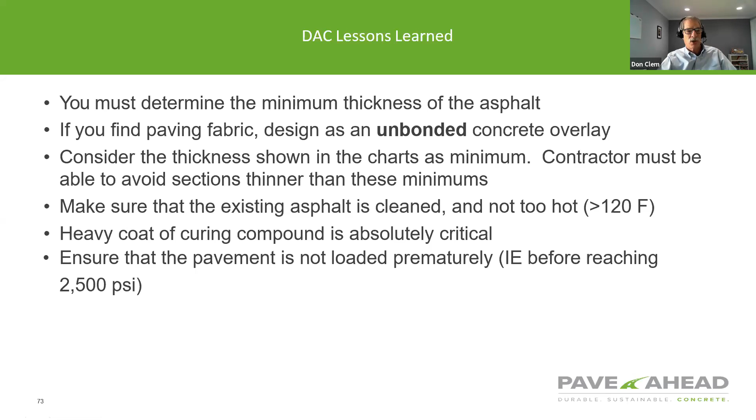And then finally, ensure that that pavement is not prematurely loaded. Remember, we're dealing with a very thin section. You want to make sure you get 2,500 PSI before you allow any kind of loading on that pavement.

I'll conclude with just a couple resources that are out there. Our Pave Ahead website, you can find case studies. Contact Theron—he can help you put together some design assistance plans or joint plans also. And we have a design program, pavementdesigner.org, which is free to use for parking lots or streets, roller compacted concrete.